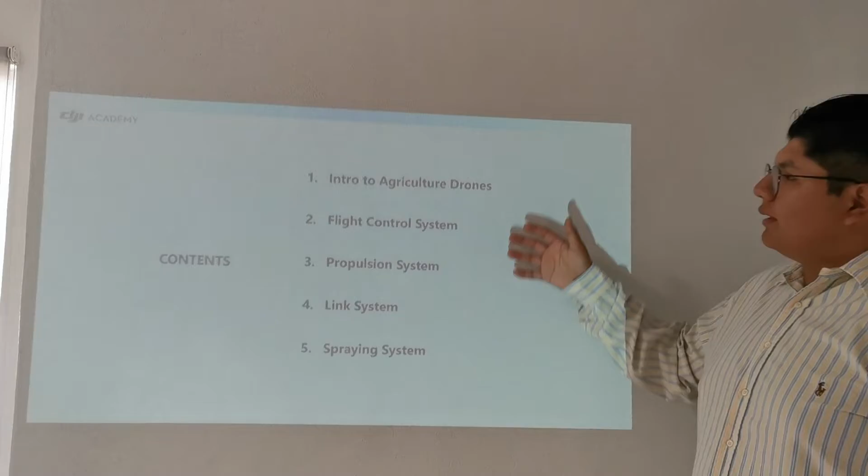Here are the topics I'm going to explain in this presentation.

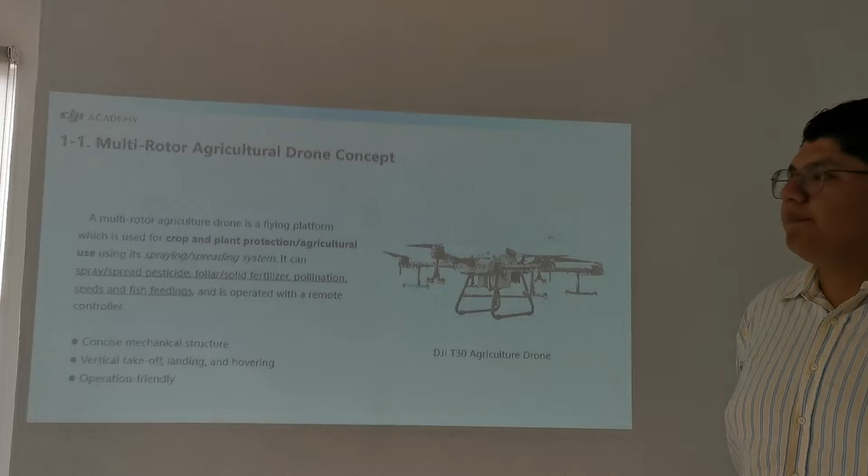The intro to agricultural drones: a multi-rotor agricultural drone is a flying platform used for crops and plant protection agricultural use. Using its spraying systems, it can spray or spread pesticide, foliar or solid fertilizer, pollination, seeds, and fish feeding, and is operated with a remote control.

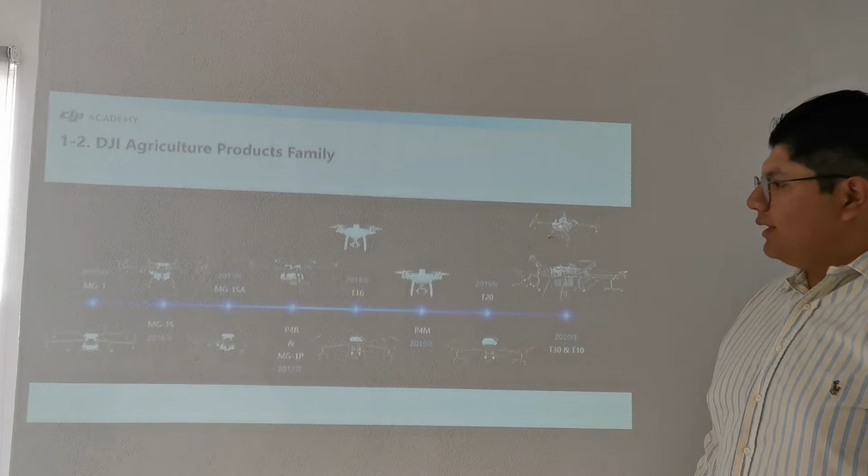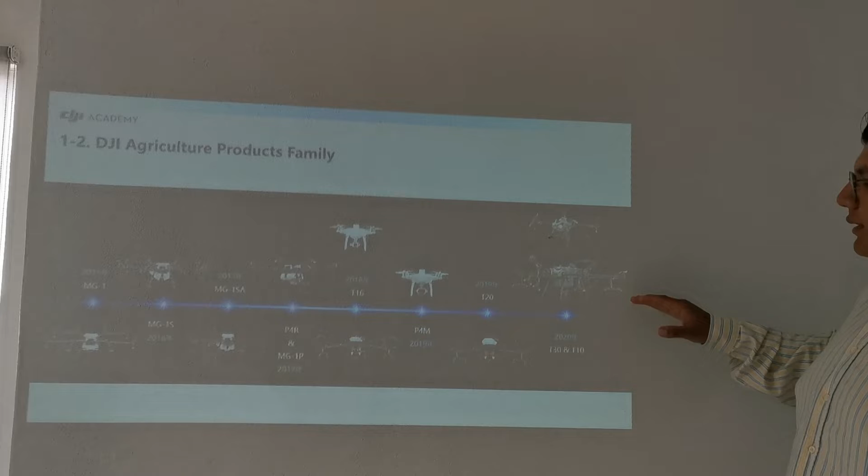The DJI agriculture product family starts in 2015 with the MG1 and finishes with the most recently released T10 and T30 in 2020.

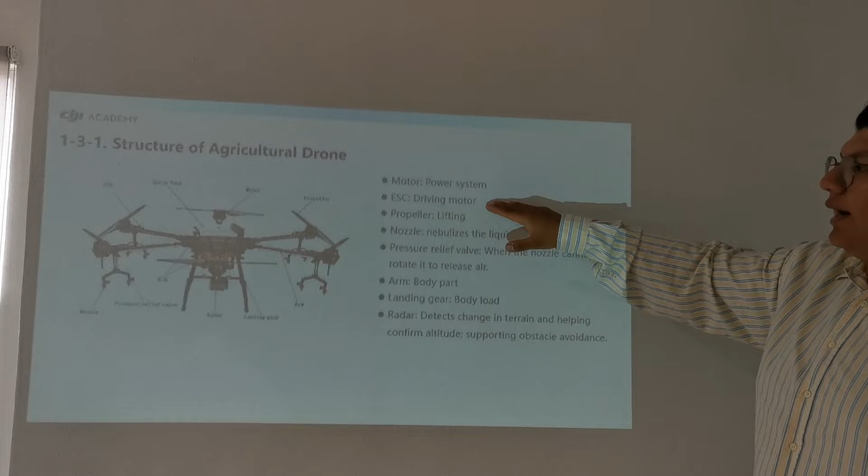The structure of agricultural drones: every agricultural drone has a motor as a power system, the ESC, the electronic speed controller, as a driving motor, a pair of propellers for each motor as lifting, and nozzles to nebulize the liquid.

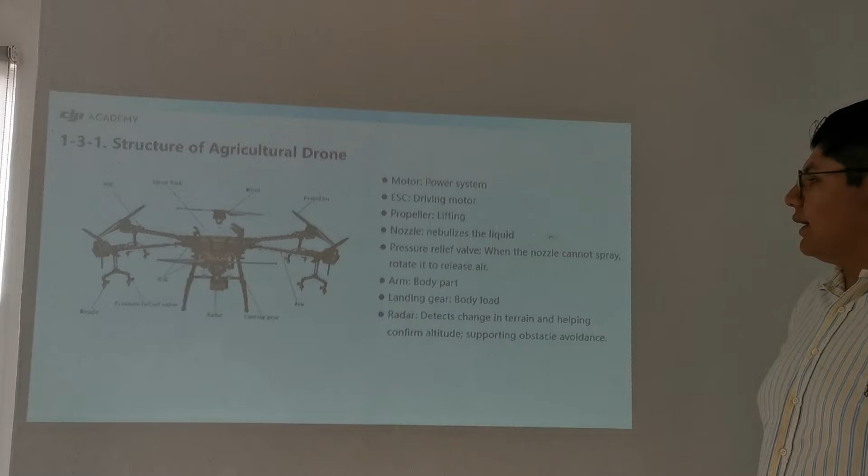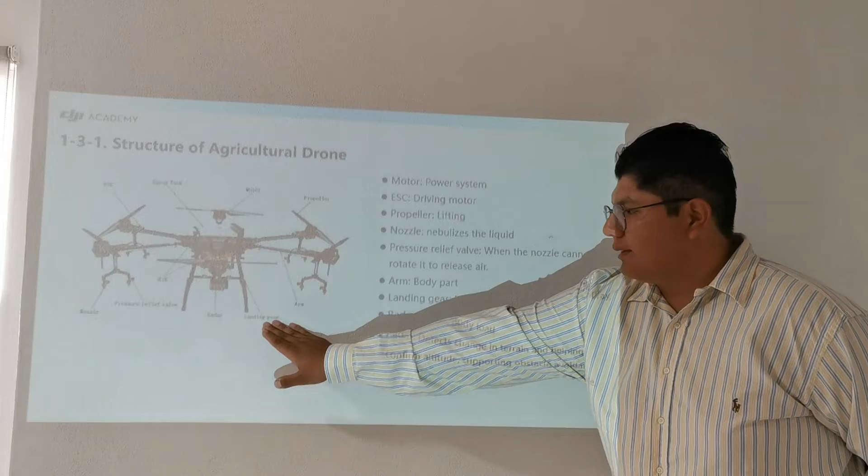The drone has a pressure relief valve for when the nozzles cannot spray, to rotate and release air. The drones also have arms and landing gear as part of the body.

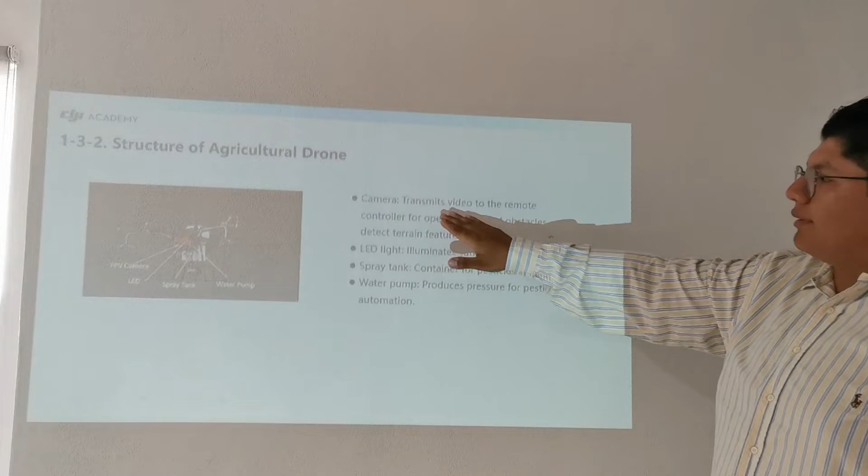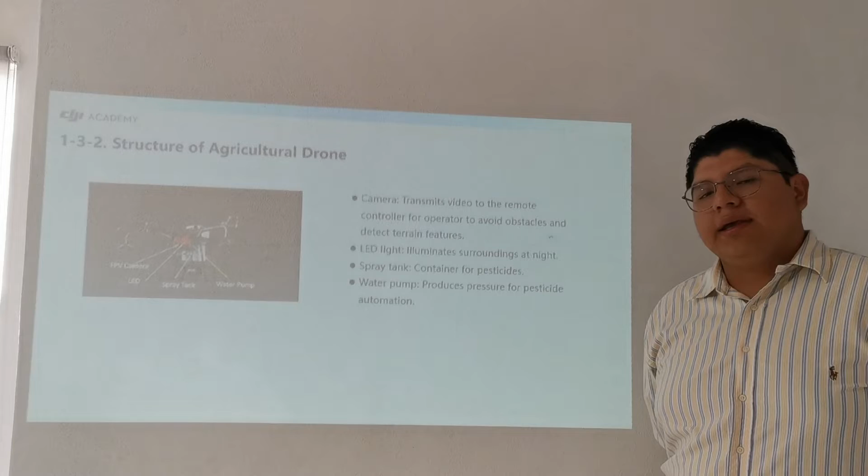All drones have a camera to transmit video to the remote controller, for the operator to avoid obstacles and detect terrain features. Every drone also has an LED light to illuminate surroundings at night.

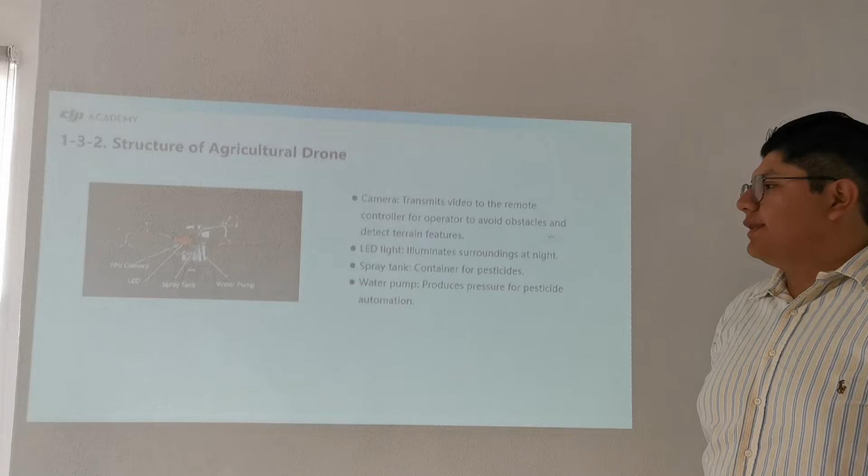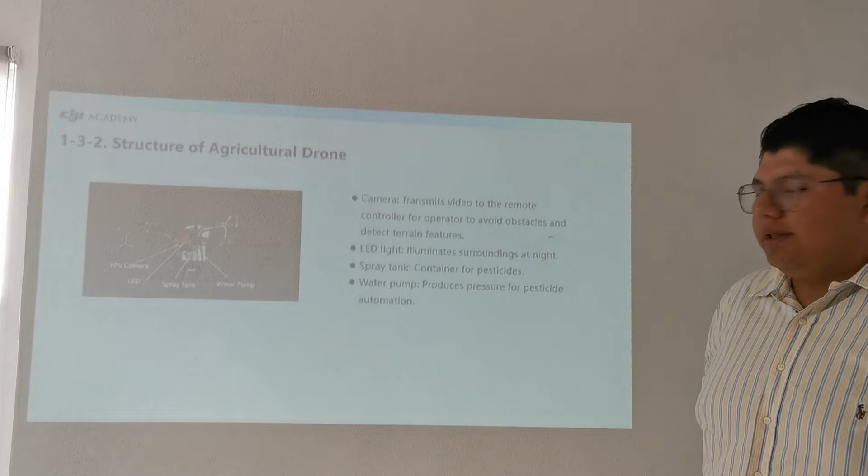The spraying tank is one of the most important parts of the drone, because it contains the pesticide, and the water pump produces pressure for pesticide automation.

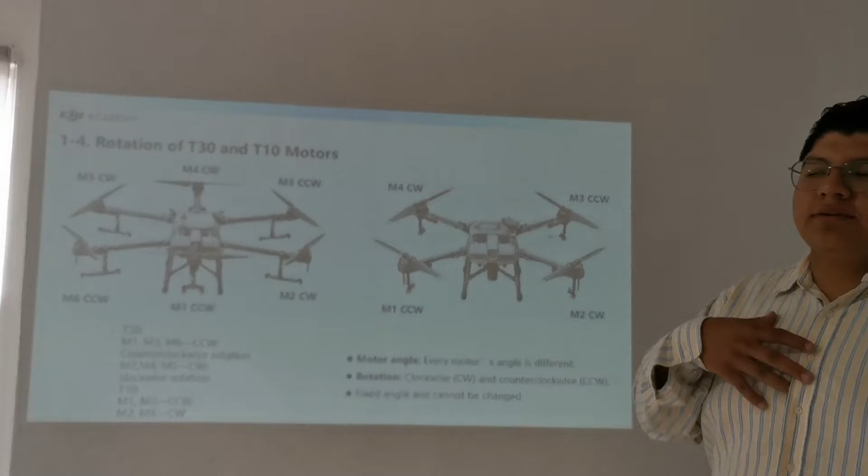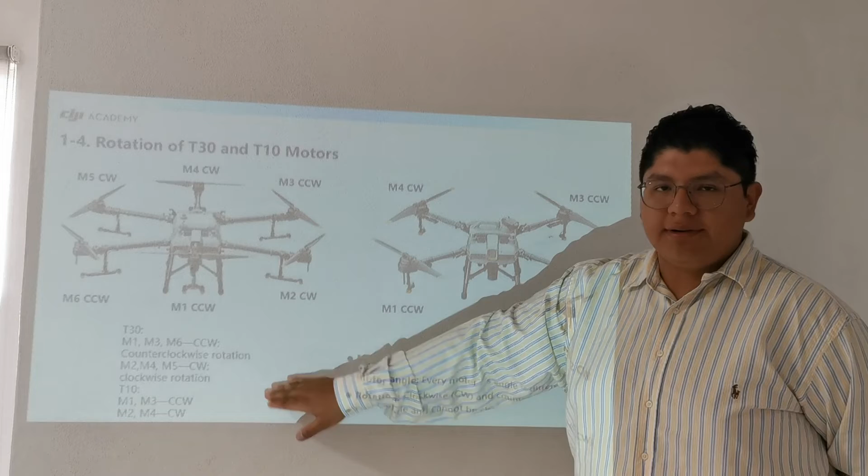The rotation of the T30 and T10: every motor has an angle and a pair of propellers. There are two types of propellers, CCW (counterclockwise rotation) or CW (clockwise rotation), each fixed to an angle that cannot be changed.

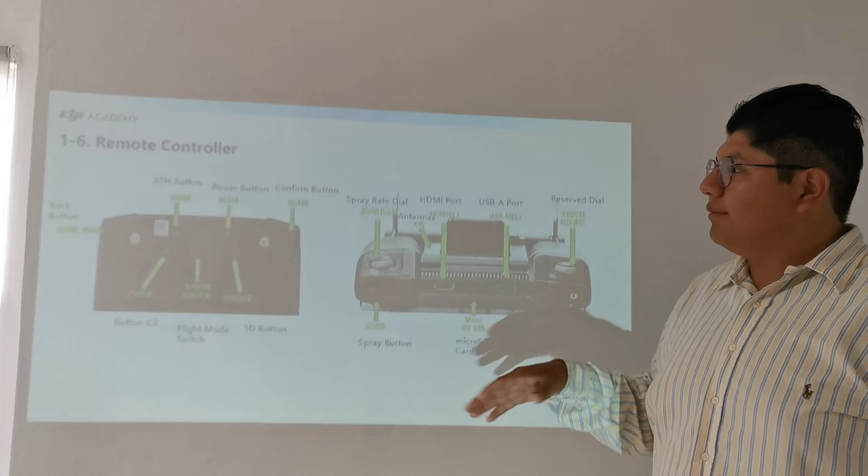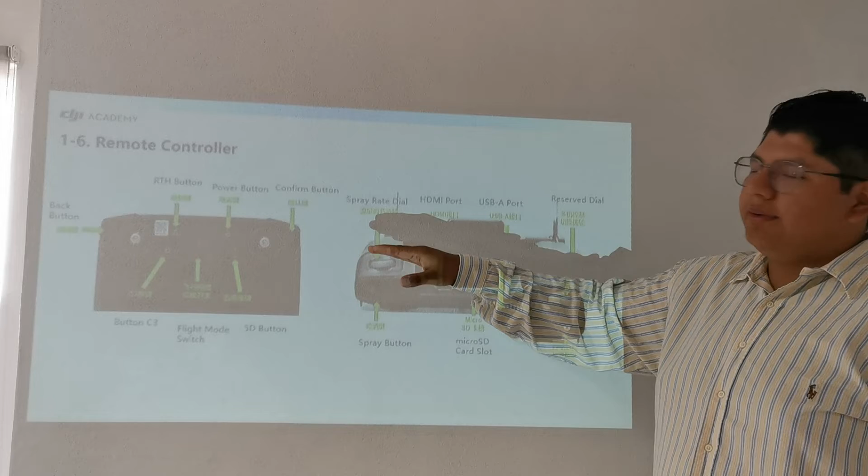The remote controller has many buttons for many options. We have the sticks to move the drone, the back button to return to the menu, the power button to lock, turn off or turn on the remote controller, and the return-to-home button to call the aircraft to the start point.

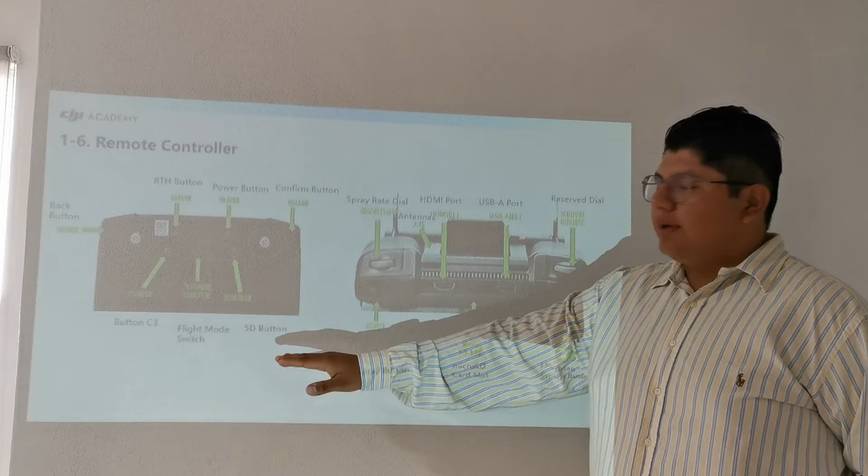The C3 button is a customizable button to do anything within the options of the aircraft. And the 5D button is customizable by the 5 moves of the button.

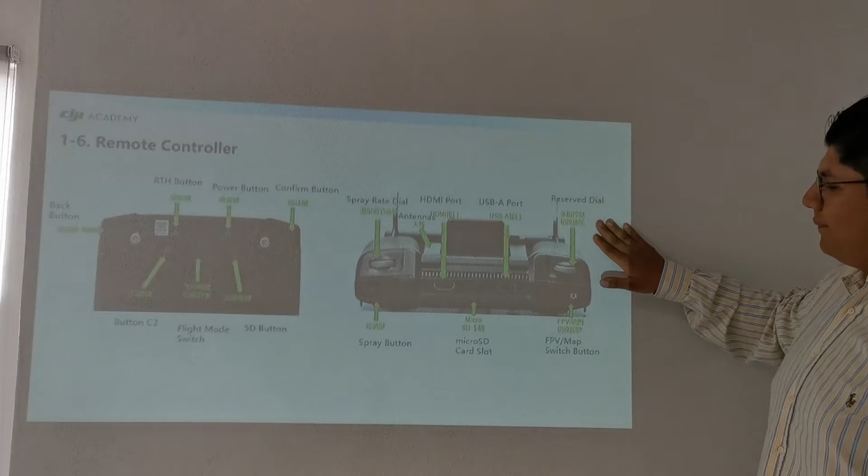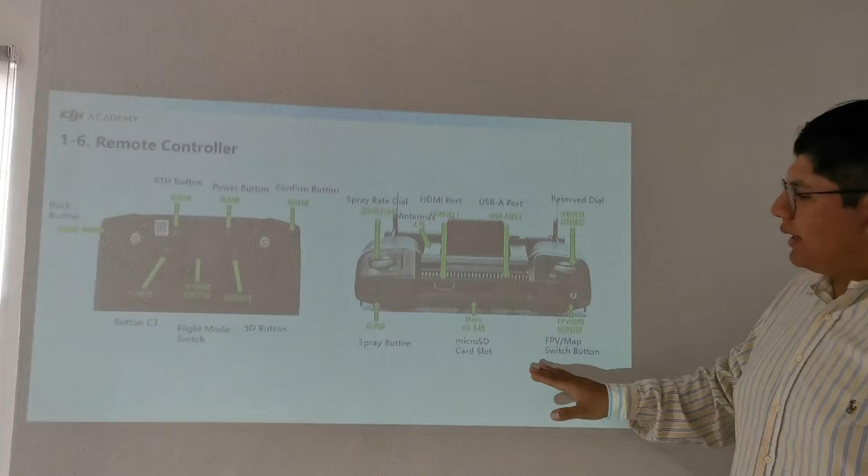On the front of the controller, we have the spray rate dial and the reserve dial, the spray button or recording button, and the FPV/map switch button to take a screenshot. We also have a micro SD card slot, a USB-A port, and an HDMI port.

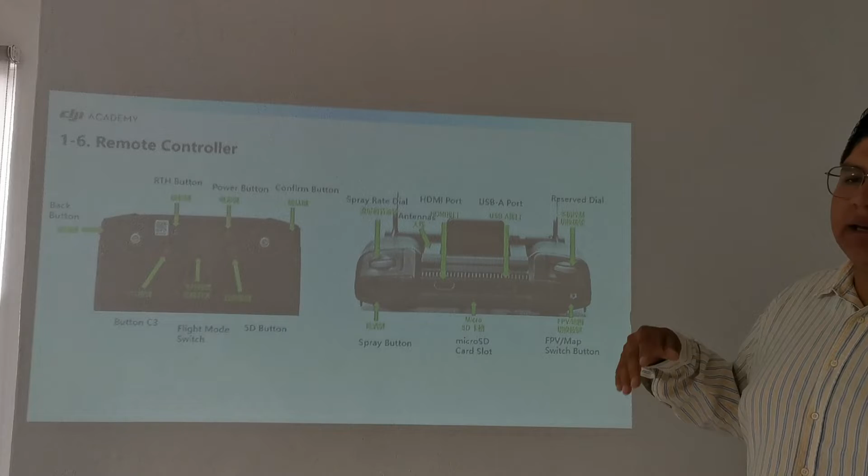We have the antennas, which can be unfolded or folded. Back near the antennas, we have the C1 and C2 buttons.

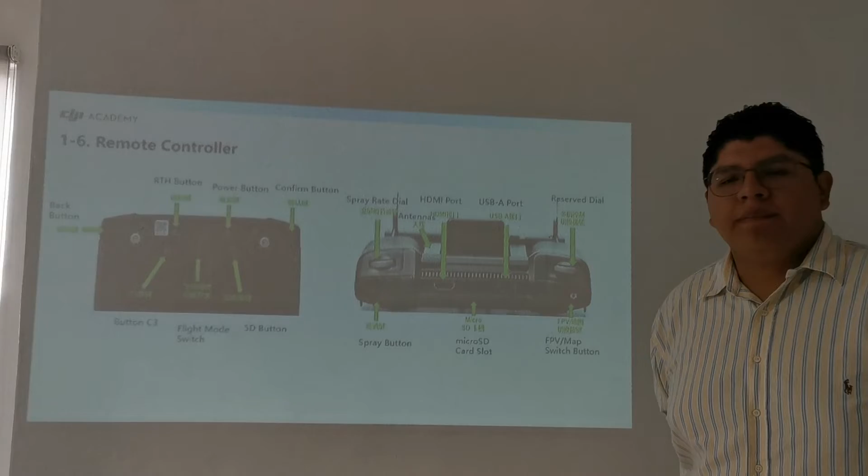For route planning, we can assign a waypoint or an obstacle point to the C2 and C1 buttons.

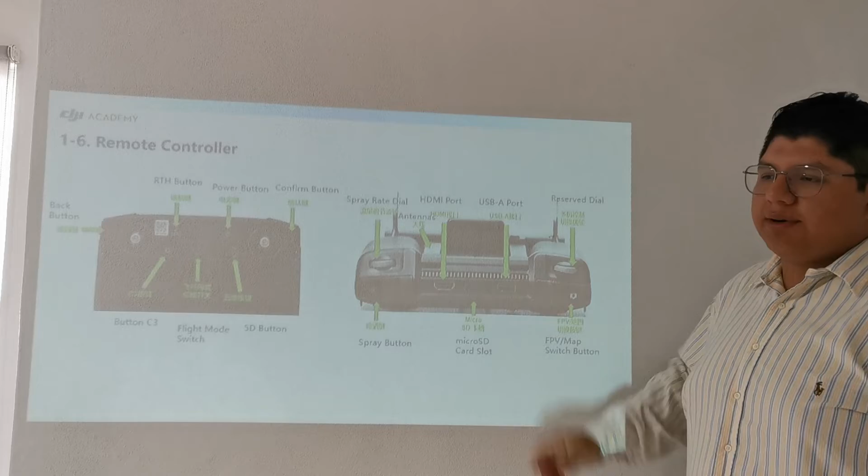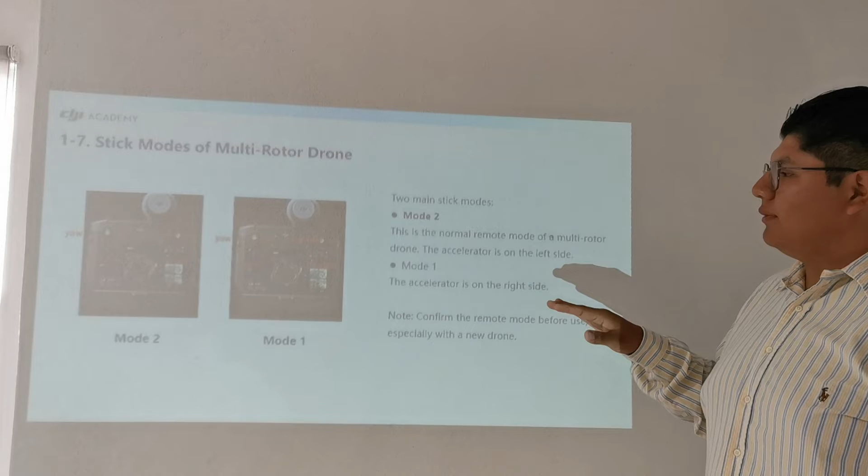The stick mode of multi-rotor drones: we have two modes. Mode 2 is the normal remote mode, with the accelerator on the left side and the movement controls on the right side. In Mode 1, the acceleration is on the right side, and the movement controls are on the left side.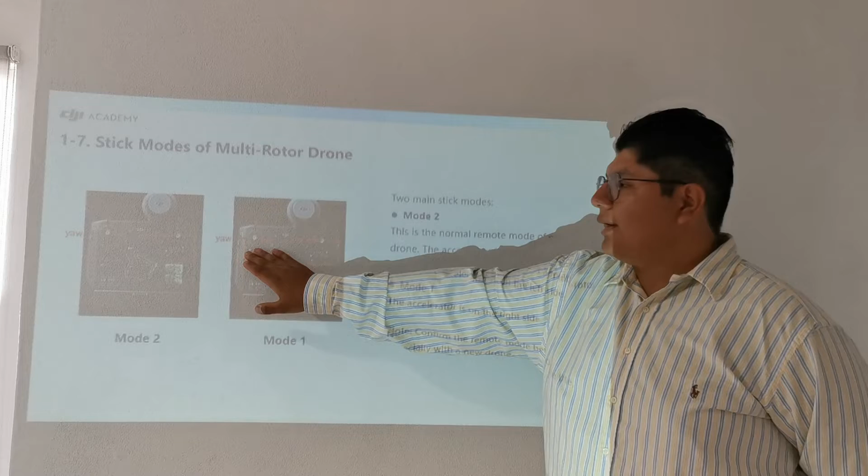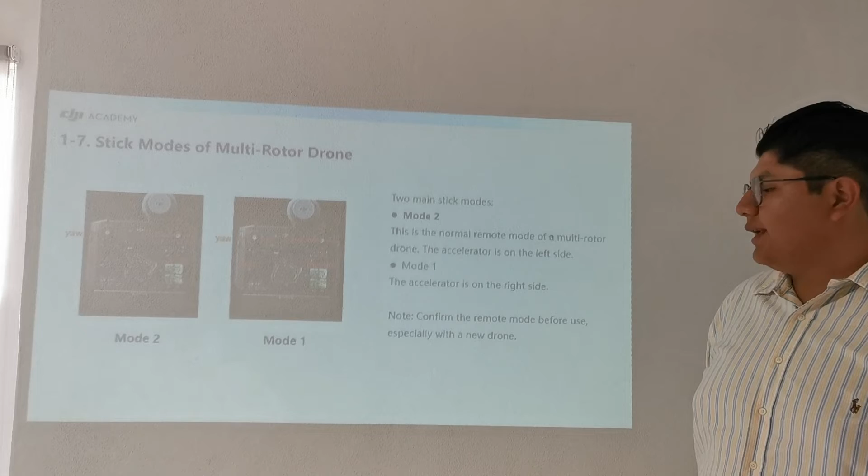As a recommendation, confirm the remote mode before use, especially with a new drone.

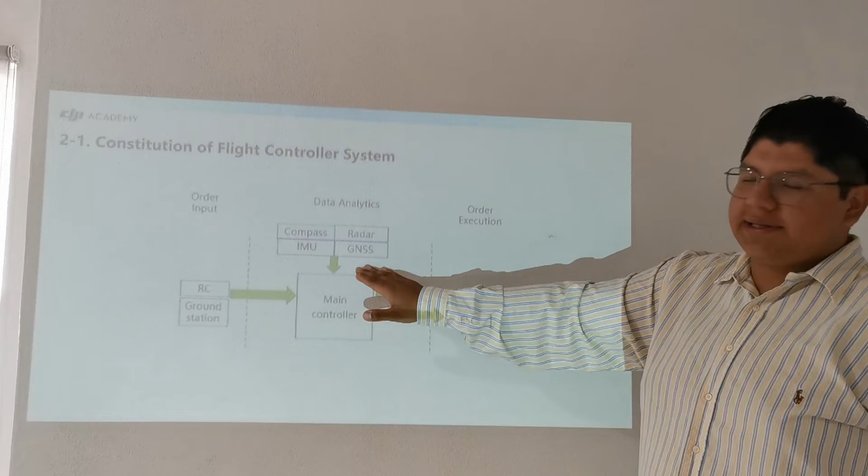The flying control system consists of an order input, data analytics, and an order executor. The remote controller and the ground station transmit information to the main controller, and the main controller reads the compass, the radar, the IMU, and the GNSS to transmit the signal to the ESC to move the drone.

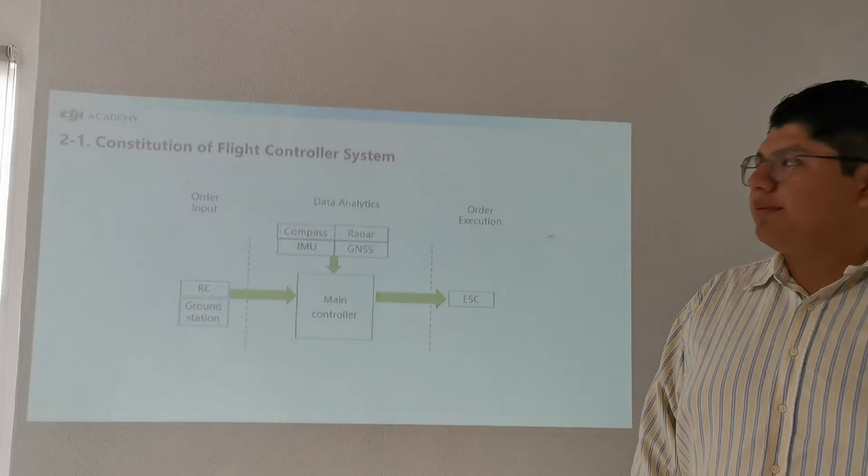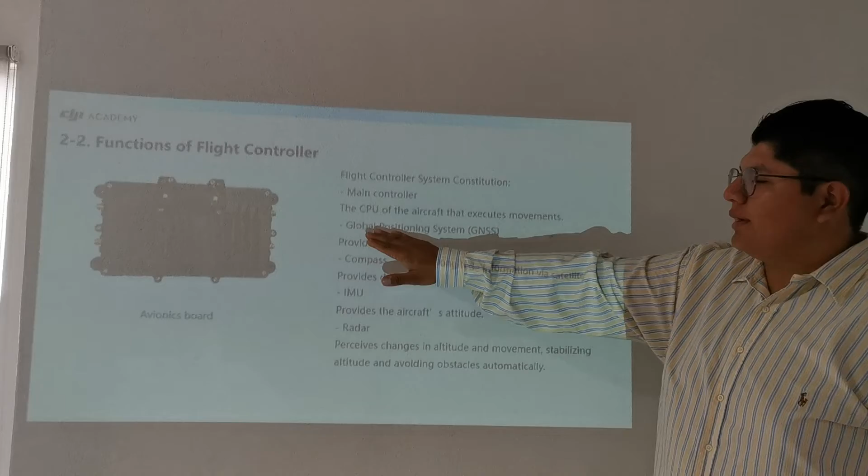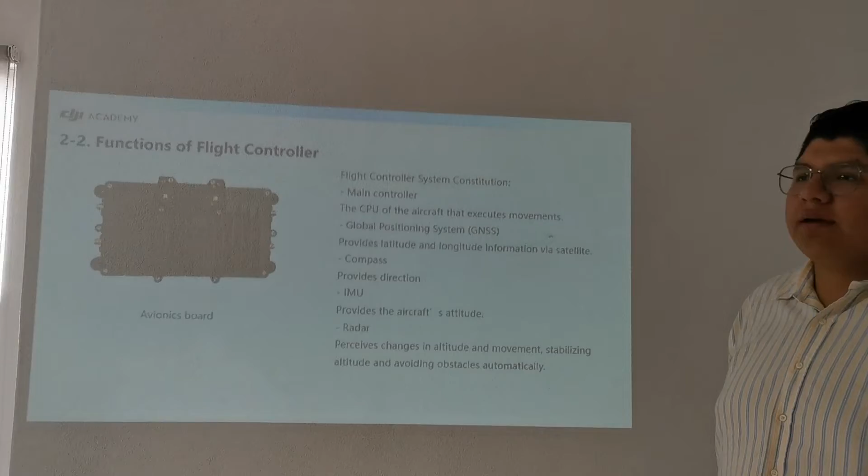The functions of the flying controller system constitution are a main controller, acting as the CPU of the aircraft that executes movements, and a global navigation satellite system, which provides latitude and longitude information via satellite.

The compass provides direction, the IMU provides the aircraft's attitude, and the radar perceives changes in altitude and movement, stabilizing altitude and avoiding obstacles automatically.

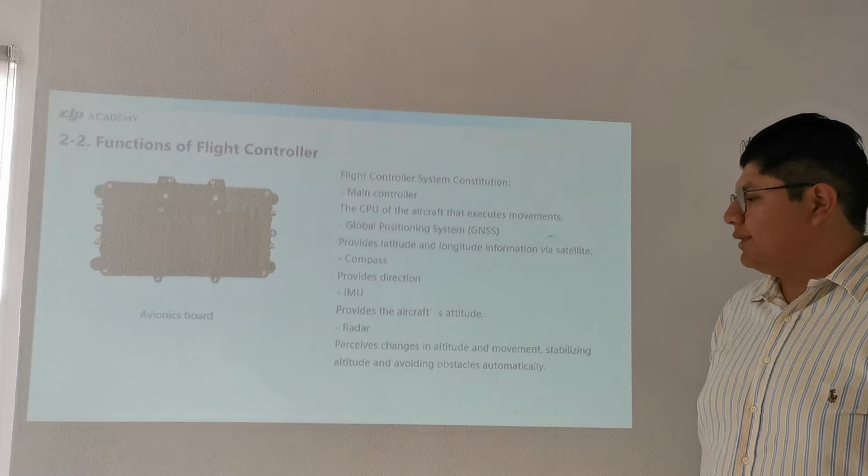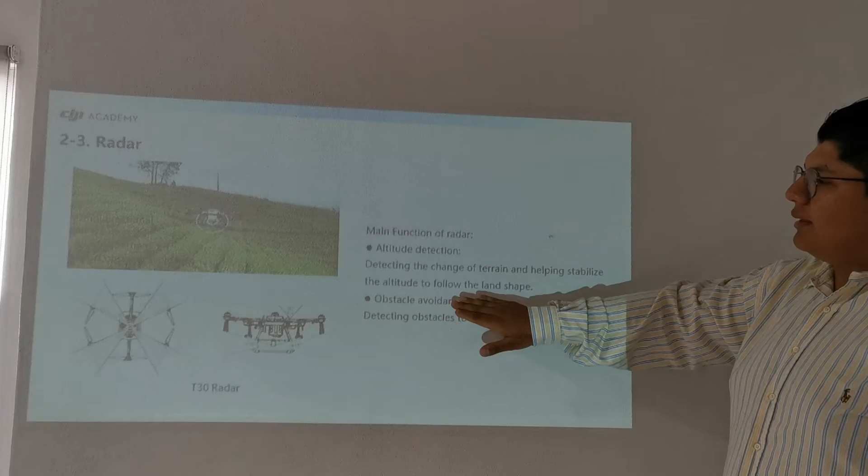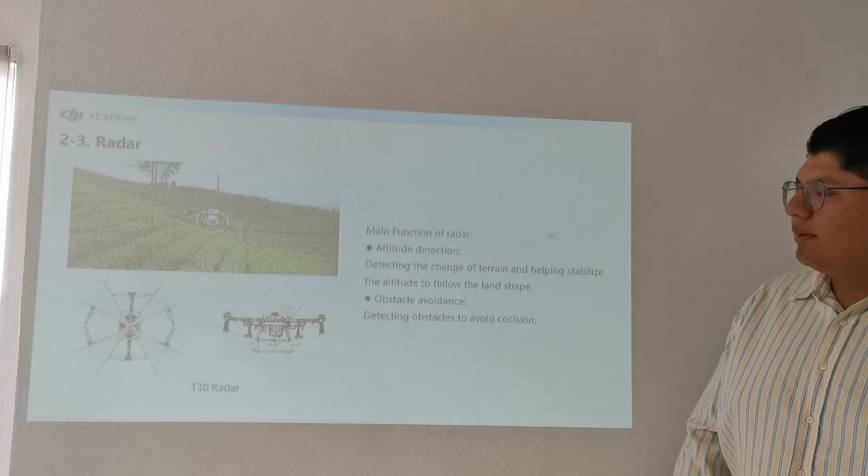The radar's main functions: altitude detection, detecting changes in terrain and helping stabilize altitude to follow the land shape, and obstacle avoidance, detecting obstacles to avoid collisions. The radar is a spherical radar and is omnidirectional.

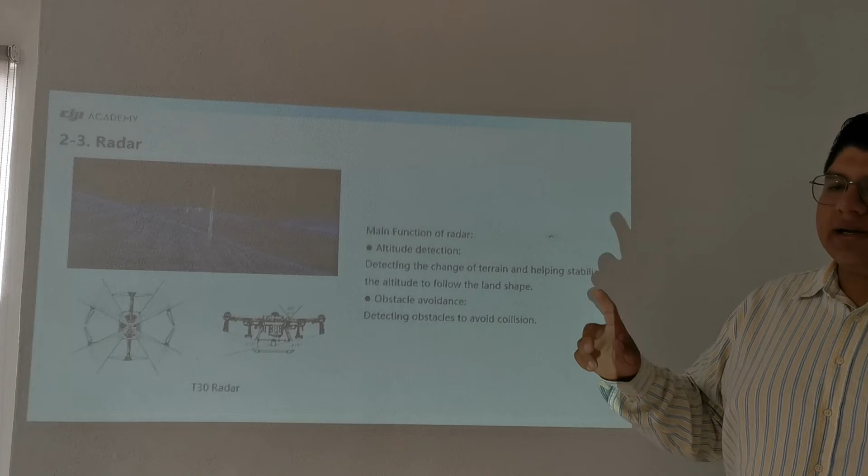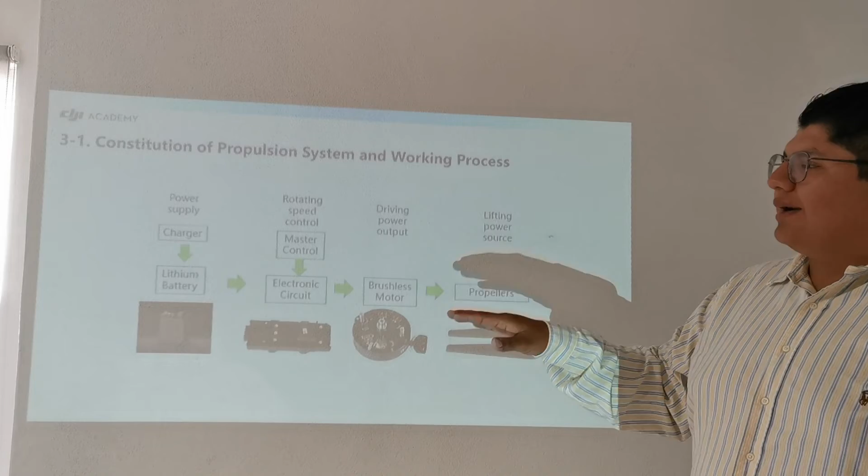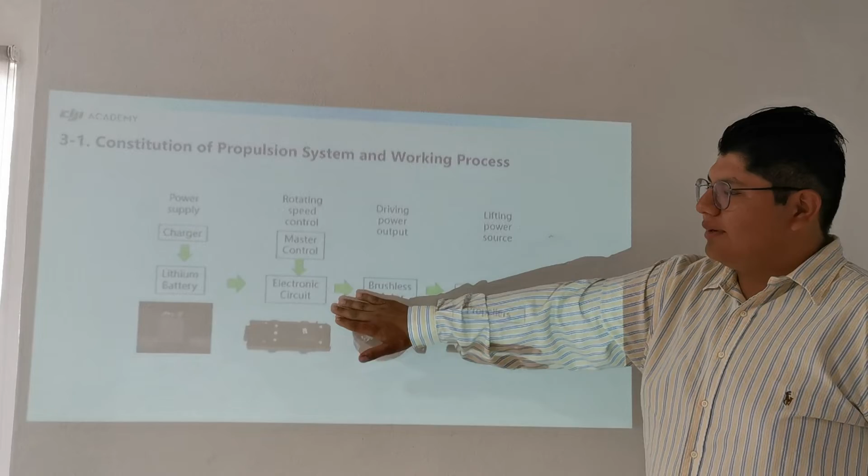The propulsion system has the power supply as a lithium battery, and the charger to charge the battery; the rotation speed control into the master control and electronic circuit, that is the ESC circuit; the driving power output as a brushless motor; and the lifting power source to the propellers.

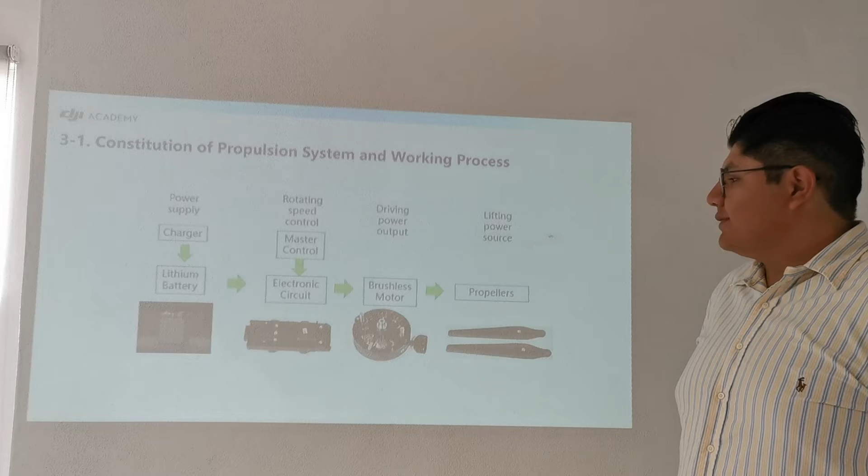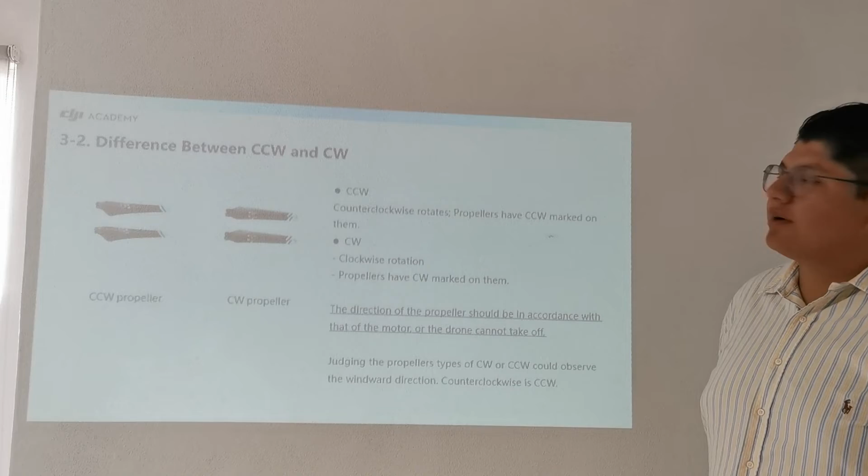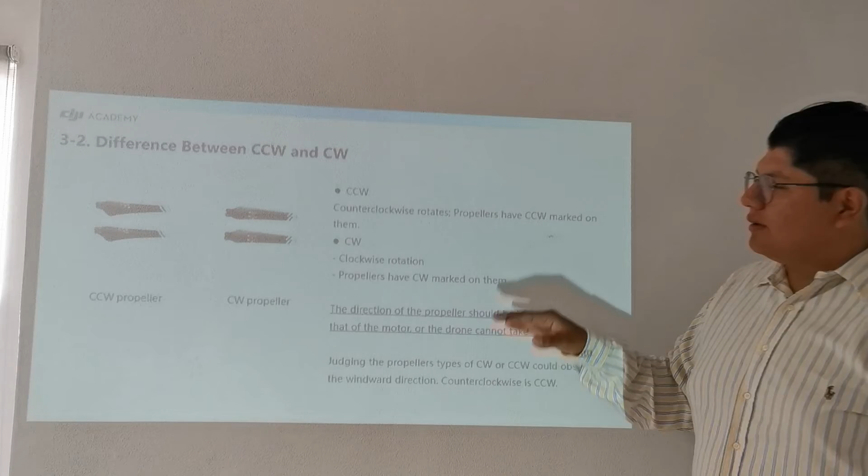The difference between CCW and CW propellers: the CCW, or counterclockwise rotating propellers, have a CCW mark on them, and the CW, clockwise rotating propellers, have a CW mark on them. The direction of the propeller should be in accordance with that of the motor, or the drone cannot take off.

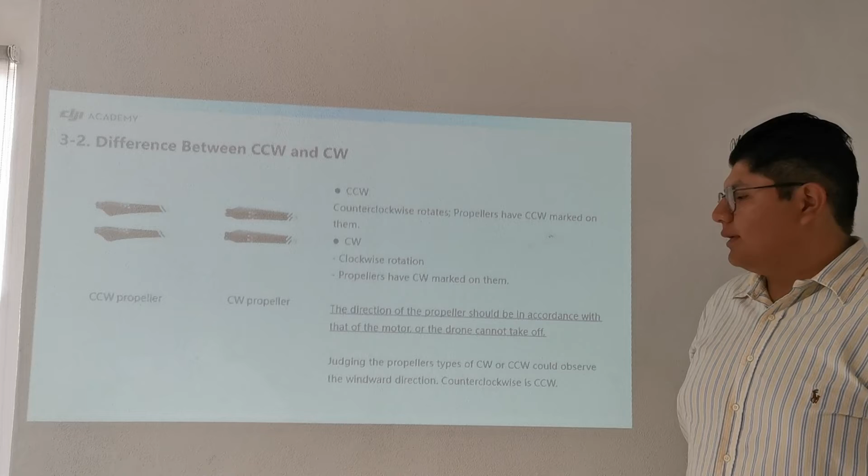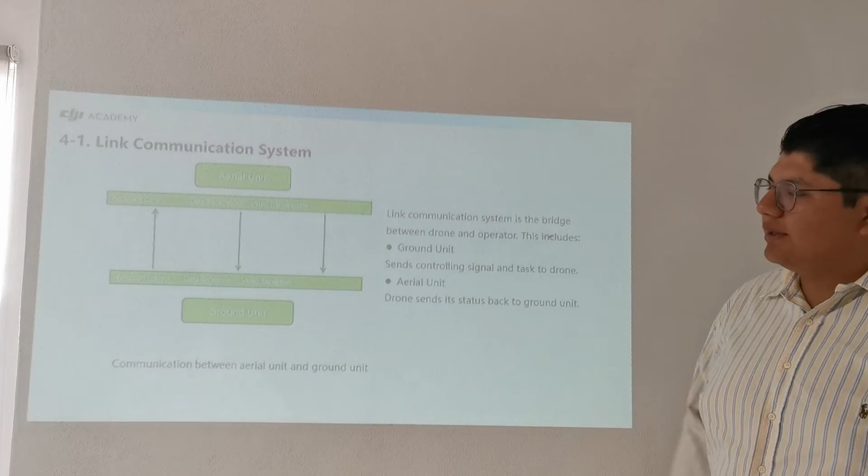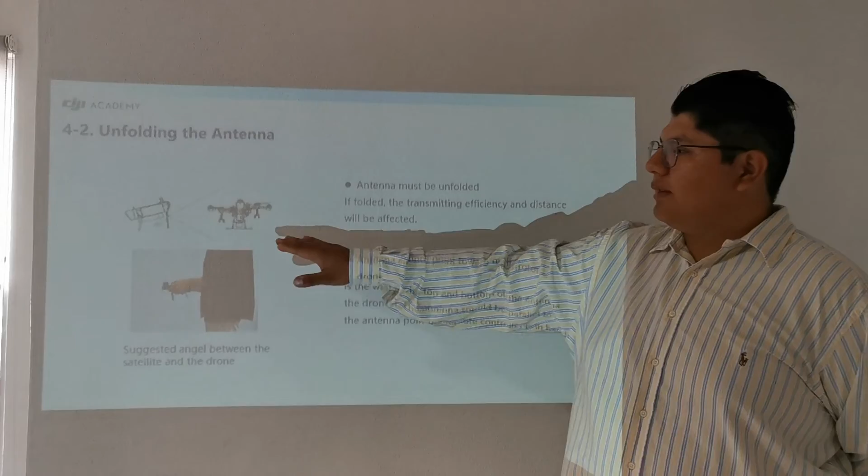Unfolding the antenna: the antenna must be unfolded, or transmitting efficiency and distance will be affected. The antenna cannot point toward the multi-rotor drone. The signal at the top and bottom of the antenna is the worst, so the antenna should be parallel to the drone. When the remote controller is in hand, the antennas should point toward the sky, as shown in the image.

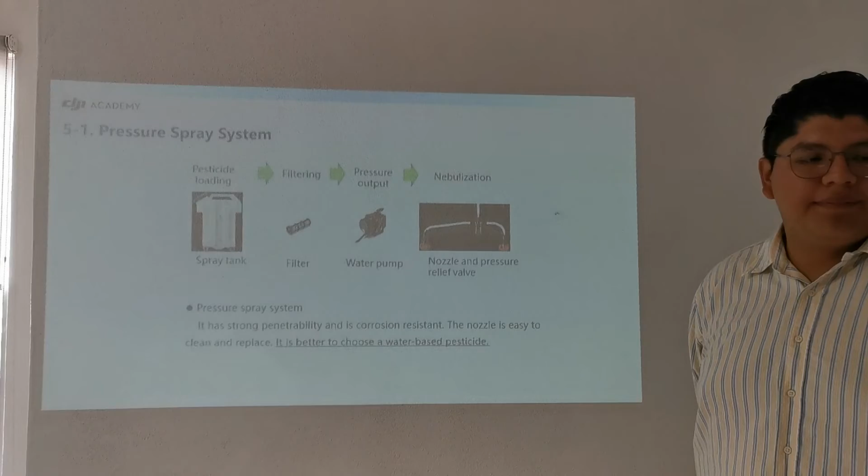The spraying system: the pressure spray system has strong penetrability and is corrosion resistant. The nozzle is easy to clean and replace. It's better to choose a water-based pesticide; we do not recommend a powder-based pesticide.

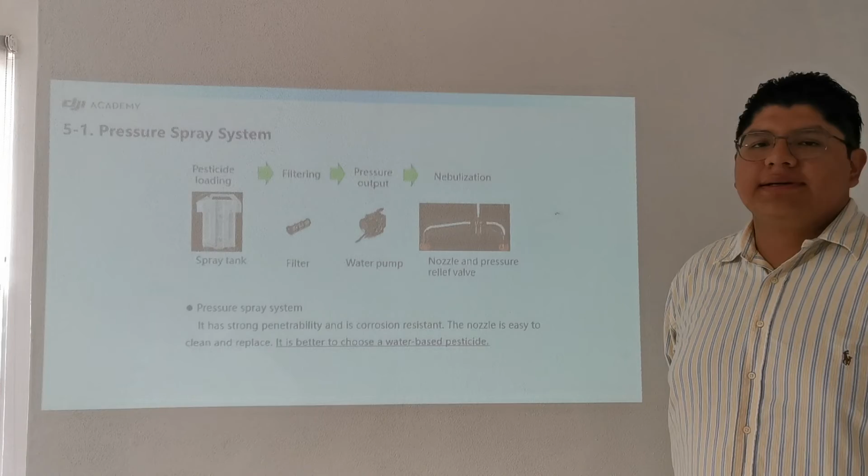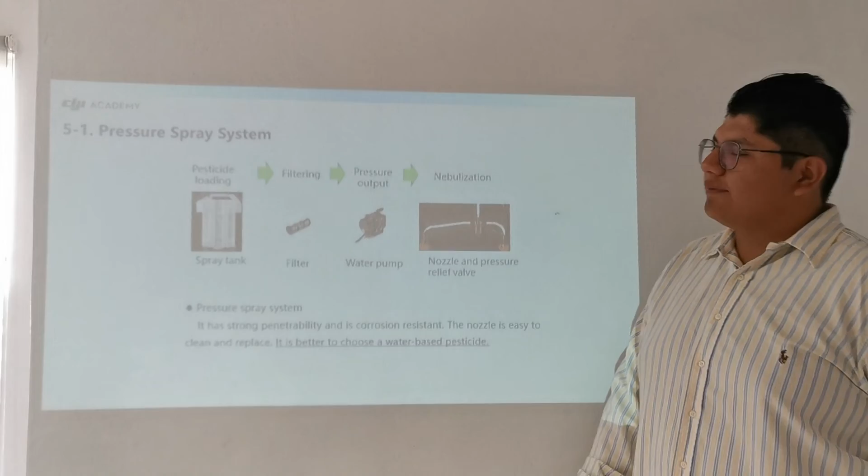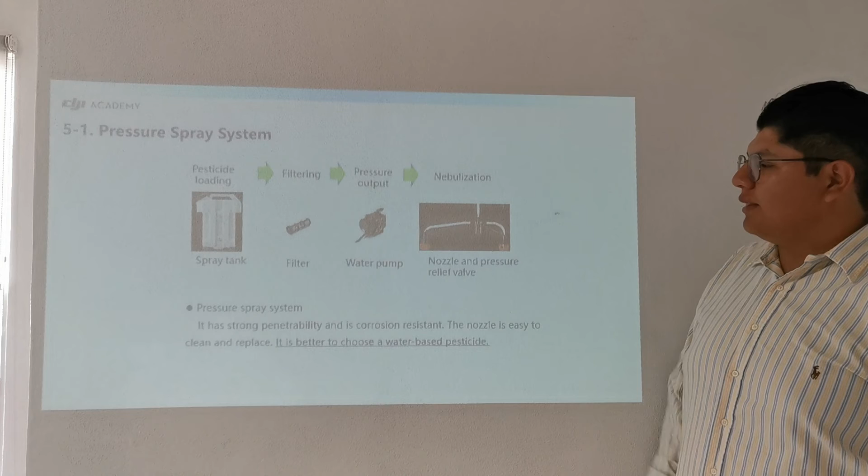The spraying system has the spray tank for pesticide loading, a filter for filtering the pesticide, the water pump for pressure output, and the nozzle and pressure relief valve for nebulization.

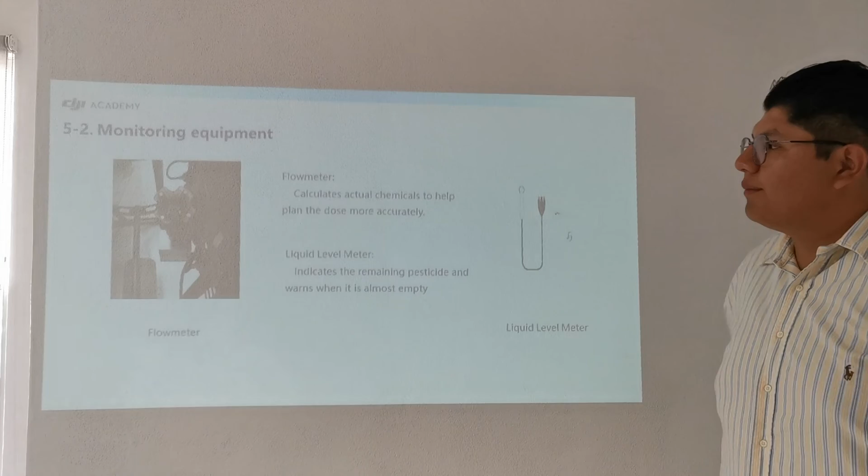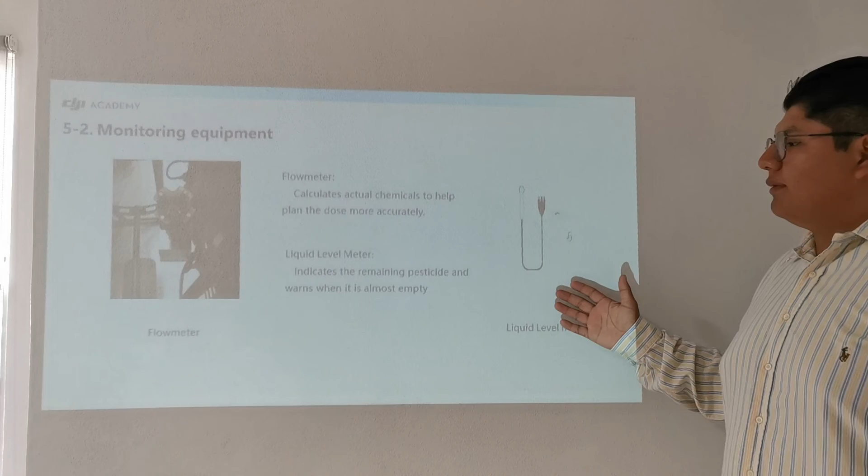Monitoring equipment: the flow meter calculates actual chemical use to help plan the dose more accurately, and the liquid level meter indicates the remaining pesticide and warns when it's almost empty.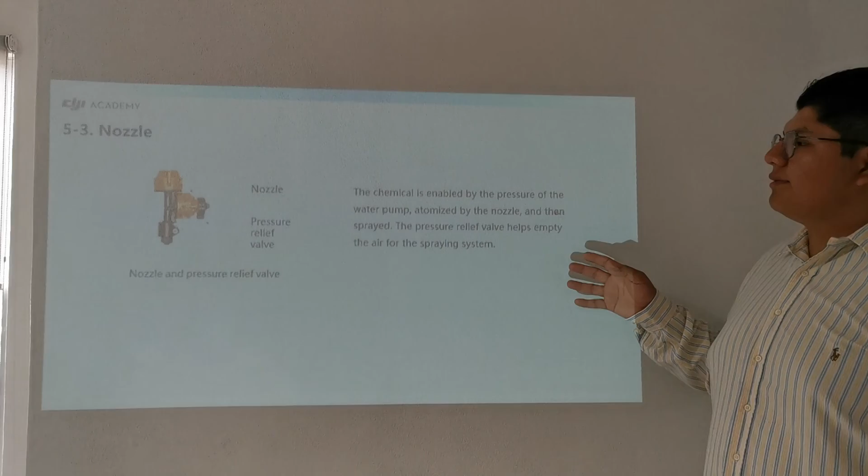The nozzles: the chemical is pressurized by the water pump, atomized by the nozzle, and then sprayed. The pressure relief valve will help empty the air from the spraying system.

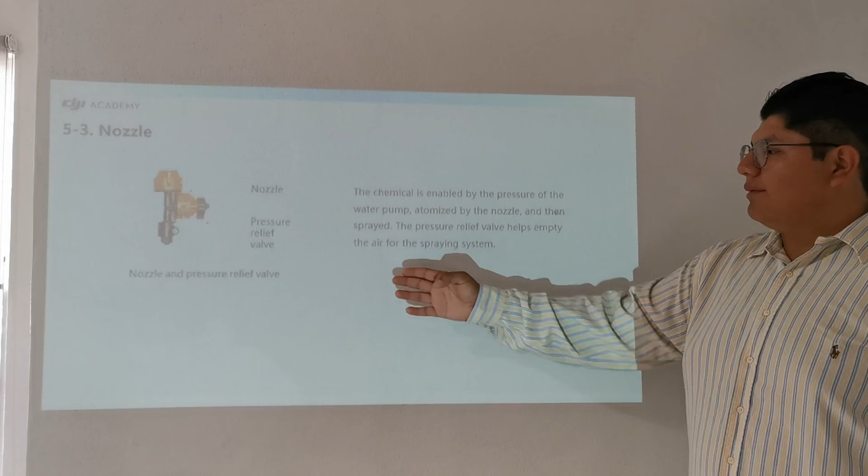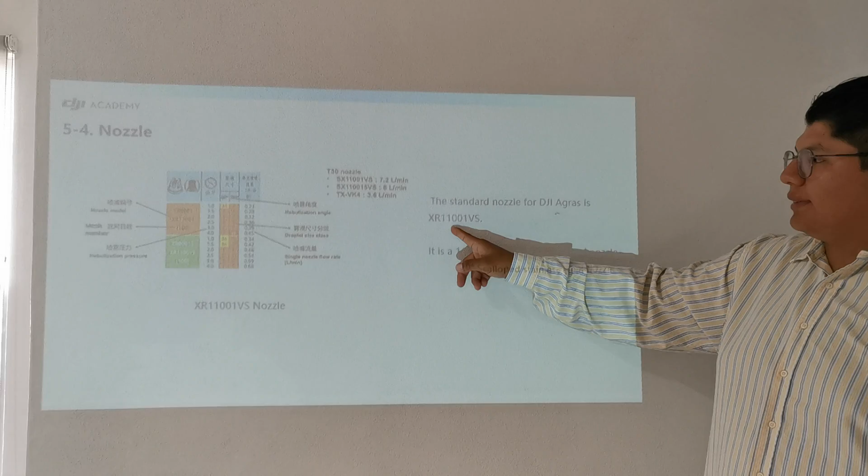The standard nozzle of the DJI Agras is the XR11001VS. It is a 110-degree fan pattern scalloped stainless steel nozzle.